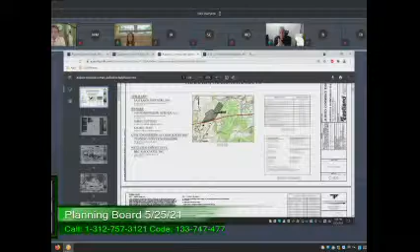I believe this has gone back to Graves? Adam? Yep, that's correct. I can give the board an update if that's what you'd like, unless you have some other business you'd like to discuss first.

You can give us a quick update, Steve. That'll be good.

Great, it looks like Adam's going to pull up plan number 11. Yep, that's the perfect sheet to start with.

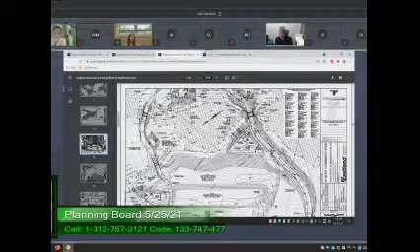I thought it would be beneficial for the board and staff that I submit a cover letter summarizing the revisions, which I did. I'm not sure if everyone had a chance to review it, but I'll run through it quickly now.

After one of our last meetings, I've been in touch with Bill Coyle, and Bill brought some common sense to the situation. He said, at the end of the cul-de-sac, you're going to have a driveway that provides access to lot 2. I said yes. And he goes, you're going to have a parking area on lot 2 for whatever building you build on lot 2.

I said yes. And he said, you're going to have a development on lot 1 along Washington Street. I said yes. He goes, it's only a short distance to connect a future parking area on lot 2 to a future parking lot on lot 1. I said, yeah, it actually is. And he goes, well, why don't we just connect those, and that'll be the second means of egress.

I talked to my client and met with the Fire Captain Morin, Fire Prevention and Safety, and the result was the plan you see in front of you.

So if you see, the subdivision road comes off Washington Street on the right side of the plan. The road continues on, goes off the plan a little bit, but then comes back on at the cul-de-sac. Off the end of the cul-de-sac, we've got a 24-foot wide driveway, which provides access to lot 2, but it also serves as the second means of egress, the emergency access road.

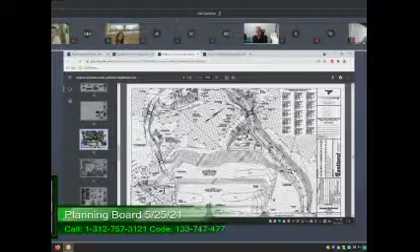We got copies of the plans from Joanna and were able to illustrate that essentially what happens is, as part of this emergency access road, gravity sewer will run in that road from Lot 1 and Lot 2 to a pump station off the cul-de-sac.

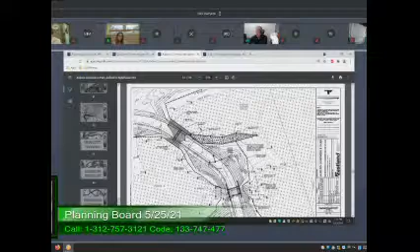You looking for the plan, Adam? Yeah. That's going to be a submersible pump station, Steve? Yeah, it'll be a duplex wet well, so it'll have a wet well and then a valve pit, a well for the valve pit with control panels. It'll be municipal grade.

I think if you look at sheet 8, there you go. So you can see on this sheet, at the top of the page, there's the existing gravity sewer line that runs along the top of the hill up there along that ridge.

We surveyed it and verified information that was provided on the plans from the sewer department. Instead of a force main running up the subdivision road along Route 20 and then up West Tech, the sewer will now just, by force main, pump up to this gravity location.

The advantageous part of this sewer connection is a couple of things. First, it's an easy run up through the town piece of land here. There's no major vegetation removal, just a lot of brush and some understory growth. I've been there personally a few times.

The most advantageous part, I think, that addresses Bill's concerns, is that the sewage running through this piping network does not go through the siphon under the diversion channel. As you may recall, that was one of Bill's concerns about other proposed points of sewer connection.

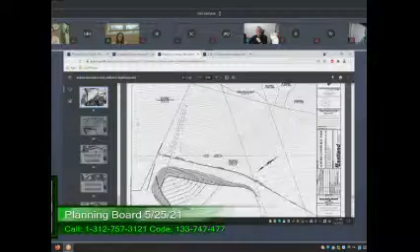Adam, could you go to sheet 8.1, please? There we go. So at the bottom, towards the cul-de-sac, we've reserved some space for the pump station.

So the sewage flows from Lot 3, Lot 2, and Lot 1 will all be fed by gravity to the pump station. Lot 1 and Lot 2 will come via the emergency access road, and Lot 3 will come directly into a manhole before the pump station, all outside of the subdivision road.

So for my client, it was a feasibility review, taking sewer out of the subdivision road as part of that infrastructure cost and putting that cost towards the second means of egress. So I think it's very beneficial for all parties that this is where we are in the design.

A couple other things briefly, following the last planning board meeting we got valuable input on tree spacing. So these plans reflect 60-foot spacing for street trees, and they're staggered on both sides of the road, not in the same location, giving a more appealing effect.

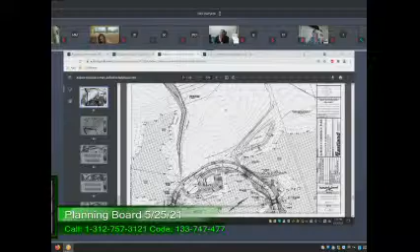And then on the electric manhole, where you have it as permanent, there should be an X cut in the frame, because you always take it off the frame, but if someone goes up to use the benchmark and doesn't know the crown of the road, they could be on the wrong side of the cover, and you could be off by as much as a tenth. If somebody's setting grades at 0.04 for drainage or sewer inside the building, it'll throw them off. So just a small X cut would work, and then put the other two on a bound or a hydrant. Okay, yep, no problem, thank you.

And then on your typical utility trench on page C 4.1, I'm assuming that could be a sewer pipe or a drain pipe, it's just typical utility, correct? Yes, correct. And that's 3/4 inch stone around it? Yes it is. It doesn't identify, it just says bedding, but the standard now, Steve, from what I've seen, is you line the trench with filter fabric, put your stone in, place your pipe, and fold the filter fabric over the top. I didn't see that detail in here. Okay, yep, this is a revised detail from our original plans when you had some comments, so I'm happy to incorporate additional revisions.

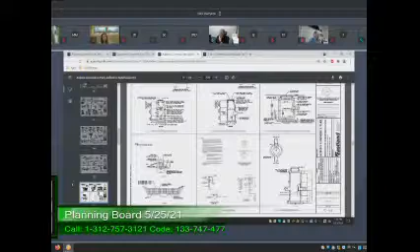And then on the details on C 4.6, the hydrant should be set on the 4-inch by 16-inch by 8-inch wide block. You put 2 of them side by side, set them in, so the bottom flange sits right on it.

Rectangular concrete blocks, 4 inches thick, 8 inches wide, 16 inches long. You put 2 of them side by side under the center of the hydrant, and the hydrant sets on that instead of trying to set it on stone, because sometimes it'll tend to settle on you and the hydrant will tip, but if you put it on the block it won't. You may not have noticed, we do call for a stone or precast bearing plate, 4 inches thick by 15 inches square. There's a lot of words on that detail. It probably could be depicted more clearly, but there's some text there that points to it. But your point's well taken, we can clean that detail up. That's exactly what I was looking for.

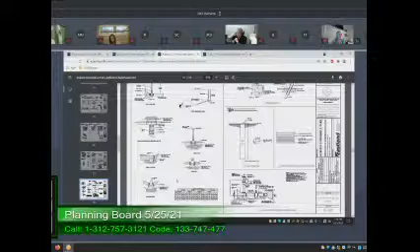And then I was wondering if you're using Megalug fittings, because on a hydrant connection. Yeah, whatever the Auburn Water District will require. Okay, because usually on a hydrant connection, you have the T with the valve anchoring T, so the valve goes right on the T, and that's what the swivel gland is for. That way it's tied to the T, so you don't have to worry about that, and then Megalug from there to the hydrant. We'll be obligated to provide whatever the Auburn Water District is going to require. If that's what they do, then that's what we'll have to do. But I agree with your assessment.

I can't find the curb stops. Oh, there it is. The curb stop should also be set on a concrete block. What that does is, you know how the bottom of the box is U-shaped, so it fits over the pipe - if somebody runs over that, it tends to shear the pipe. So if you put a block underneath the actual curb stop, that prevents that from happening. Speaking from experience, because it's happened to me.

And I think that's all the comments I had. If that street light does not emit light from the top, I think it's a nice design for the street light, kind of adds a little character. No, I think this is my last comment.

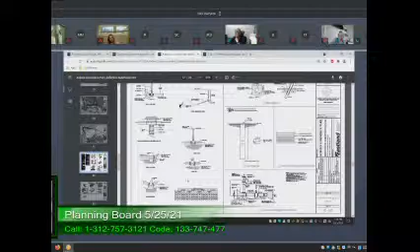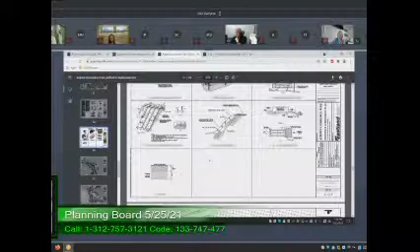No, it isn't. On sheet C 6.4, on your curb detail, I know you're putting in the bituminous curbing, and the way this detail shows it, the bituminous curbing sits down into the gravel compacted subbase, where the bituminous curb would actually sit on the binder, and then you put the top course down. Yeah, these details get a little bit tricky because the intent is to show so many other things. But a thorough guy like you notices that sort of stuff, so we'll clean that up. I just didn't want the contractor to say, well, it shows it on the plans, that's how I'm doing it. Change order, change order number 1. Yeah, exactly.

Just out of curiosity, do you know what Class DI the town of Auburn calls for on the water main on C 7.1? Probably Class 52, that's general. Yeah, should be 52.

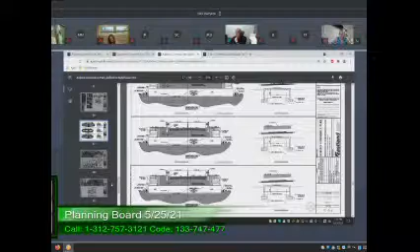Okay, last but not least, the bridge crossings with the sewer and water main. The sewer's not there anymore, so you don't have to worry about that. But the water main, I didn't see a detail for that insulation. I may have missed it. I was wondering how thick the insulation was, and was there an aluminum jacket, a protective jacket going over the insulation? We did not specify or provide a detail on the insulation.

There's a number of products out there. If you'd like us to check with the Auburn Water and Sewer Departments, we can do that and inspect the insulation. That would be great, whatever they want.

I don't know, is this Auburn Water Department or is it Elm Hill? Auburn Water. Is that okay? Yep. And the reason we'll need it, we've got plenty of cover over those pipes, worked out really well. It's just that under the culvert will be at risk, probably more so the water than the sewer because of the heat the biology puts off in the sewer. But it's always safer to insulate.

Oh, absolutely. All you need is a frozen water main down there in the middle of January and there's a fire. That would not be good.

Is there anyone else that has any comments? Being none, may I have a motion to continue this to our June 8th meeting? John, this is Steve, I'll make that motion. I'll take Steve's motion. Ronnie, I'll take yours as a second.

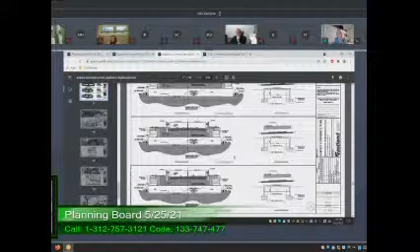Next up on the agenda, applicant Modern Structures Incorporated, a definitive subdivision plan for 3 building lots and construction of roadway and related infrastructure improvements on property located at 92 Tinker Hill Road, map 59, parcel 5. We received an email, which I'm sure you've read, but Adam got the letter from them on Thursday, and they are requesting to withdraw without prejudice for this project because of the cost of materials. Am I correct, Adam? That's correct.

Could I have a motion to close this hearing? Steve: I'll make a motion to close the hearing. May I have a second? I'll second, John. Thank you, Ron.

All those in favor? Todd? Aye. Steve? Aye. Ron? Aye. I myself, John Regan, an aye.

It is a vote. May I have a motion to allow the withdrawal of this without prejudice, so they'll have the ability to reapply at a later date? This is Steve, I'll make that motion. May I have a second? This is Todd, I'll second it.